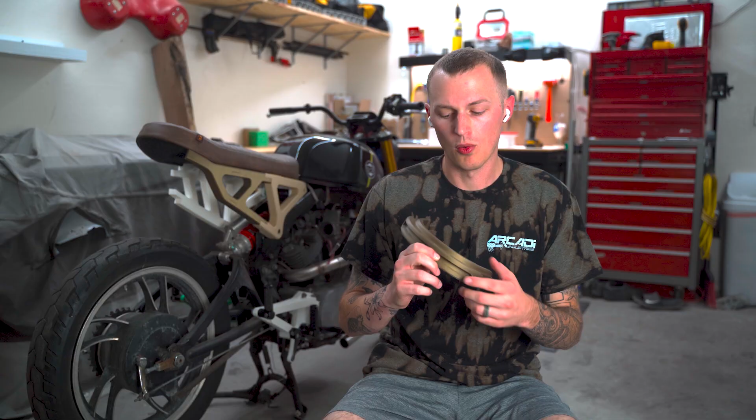Hey everyone, in this video, I'm going to show you how I created the carbon fiber, or forged carbon fiber, mold for the tail piece of my subframe. So I'll take you over to the bench and I'll show you exactly how the mold works, what the design process is, and then we will actually start forging the part.

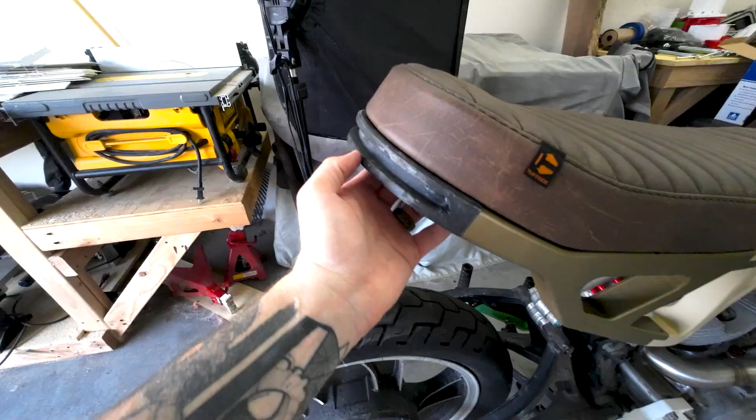All right, so we need to make a mold for this part here. And you can see I have the components here, but let me talk you through exactly how this process works. So essentially this is a bunch of carbon fiber pieces, right? They're cut up into a bunch of 1-inch sections, and this is how we're going to create the part.

So to create a forged carbon fiber piece, you essentially need to create a mold for a shape of the part, and then we're going to compress it with a bunch of force and mix it with epoxy to create the part that we're looking for. So when you have a part that you're looking to create a forged carbon fiber piece or a mold of, essentially there's a bunch of different ways you can do it.

What you want to do is you want to take the part in its most flat state, and that's kind of where you want the pressure to be. So we need to create what we call a piston to push in and create this component. So obviously if you tried to mold it like this and press it this way, it's not going to work because of the shape of the part.

We could place it like such and push in and create it in this direction. But the problem with that is when you're filling the mold, it will be difficult to fill that perfectly evenly. So essentially you want to do it like this. This is the shape that we want to create for our mold. And then we want to fill it up with the epoxy and the carbon fiber and then create our part.

So when you're creating molds, you typically need to have a draft angle. So you need to have some sort of angle on it so that you can pull it all out. Otherwise, you need to have a bunch of pieces. I chose to do a bunch of pieces of the mold just because then my parts don't have to have a ton of draft on them. And the draft always makes it a little bit more complex.

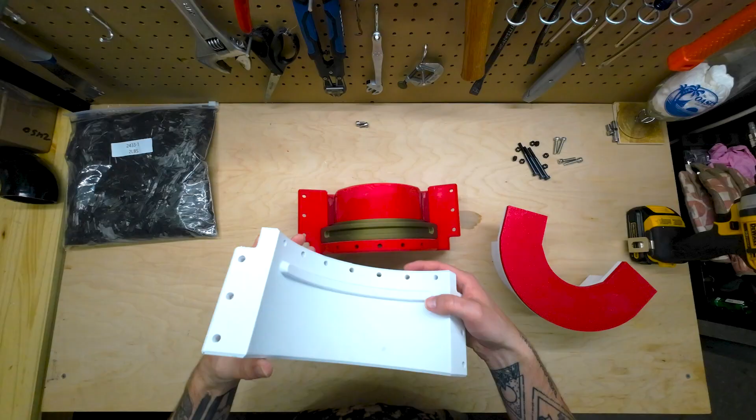So the part's in the mold, and you can see I have this other piece. This is the front piece that I've designed, and it has the cutout specifically for the brake light pocket. So this will go over, it will place in here, and this is what we will bolt into place, right? And that is what's going to create the shape, the outside shape. And it will also create that brake light pocket.

So then when we remove it from the mold, essentially what we'll do is, I've got these flanges here that are bolted in place, and we've got these bolts in here. So essentially, when those are all unbolted, I'll slide this out, we'll unbolt these side pieces, and then the part will come right out the front.

Now, what you'll notice is this section here is quite large compared to the actual part. So when you place the carbon fiber and the resin in here, because it's not compressed, it's going to be quite a bit higher than what the actual part is. If you just make your mold the same shape of what you need, you won't be able to compress it enough to get it all tight.

So essentially, we're going twice as tall on the piston side as the actual part, because when we put the carbon fiber in with the resin, it'll probably be quite a bit up here, and then we need to compress that down. So the piston, which is what we've been talking about, has the shape of the top of this. So you can see this part kind of has a lip to it, and this piece fits underneath the seat.

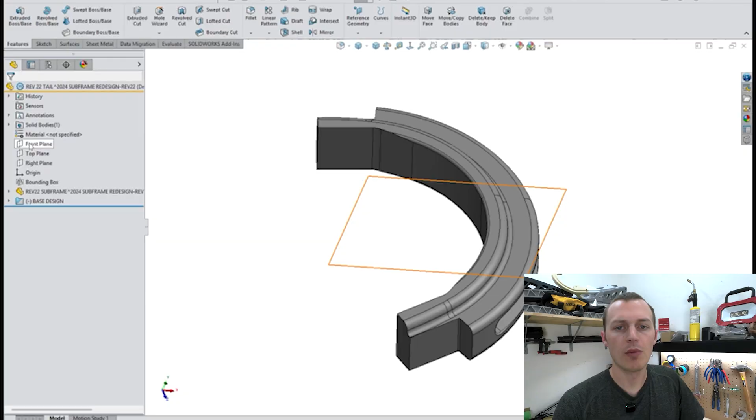So make sure that all of the components to your mold have chamfers or radiuses on them so that you can actually get a chisel in there to chisel them out after the mold's all done.

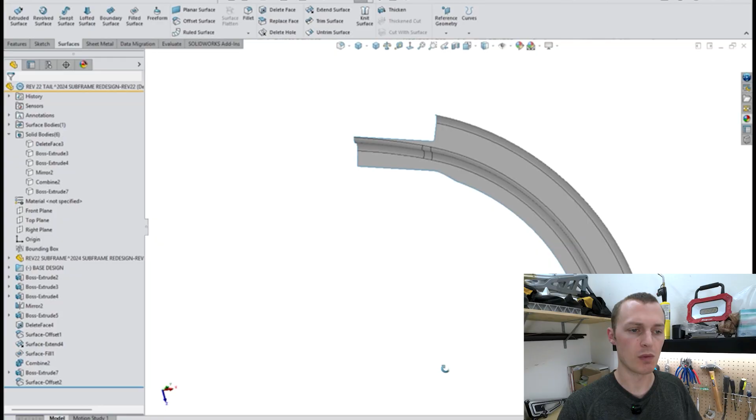Because when you pour epoxy, you essentially are creating a vacuum in there, and it makes it really difficult to split apart. So much so that some of these pieces that I have actually broke the 3D print right off. So you definitely want to take that into consideration.

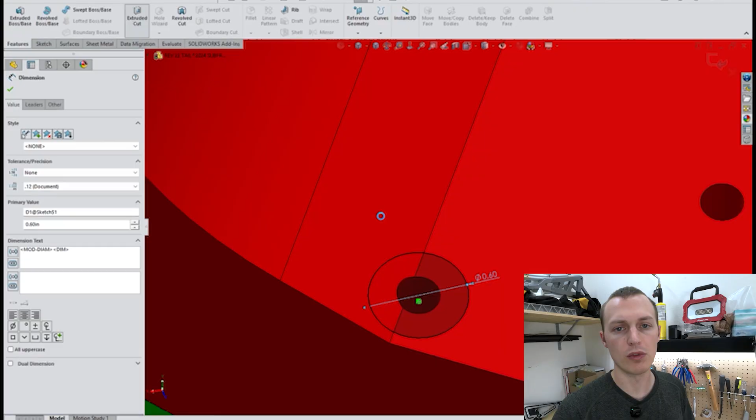I always think creating more parts of the mold is a little bit easier to take apart than trying to use draft and pull them out using the draft, but that's just my personal opinion. It all comes down to the geometry that you have and exactly what you're trying to do.

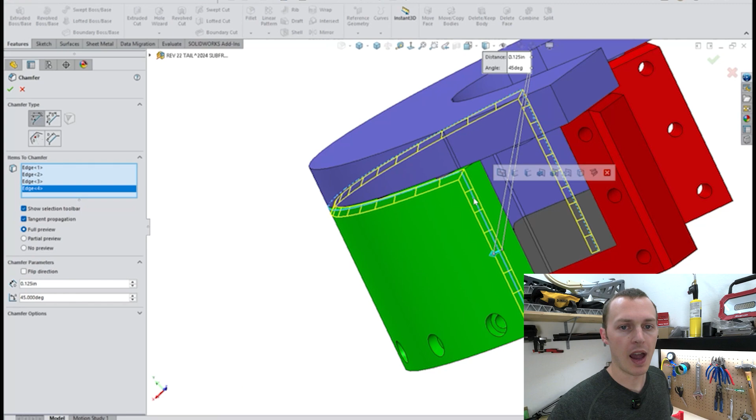So as far as 3D printing goes, they suggest on their website or in their videos to use PETG and use a 75% infill and 5 wall loops. With how large these prints were, it would actually have taken so much material. So I did 6 wall loops on the 3D print, and I did like 30 to 35% infill, and it actually worked totally fine. In the next round of forging that I do, I'll probably go even less just to use up a little bit less material.

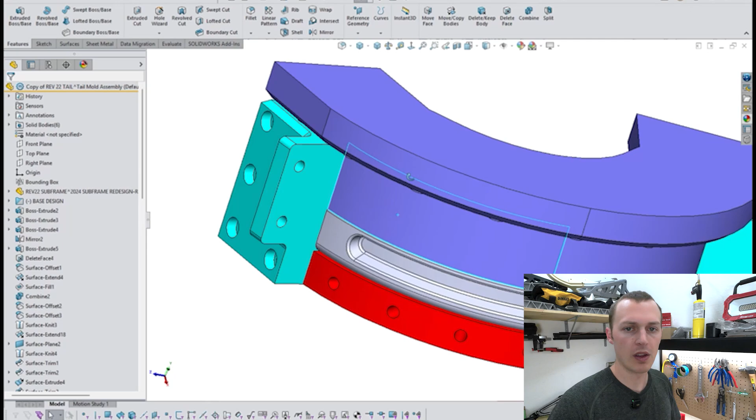But yeah, so definitely use PETG, make sure you use release wax. I printed with a pretty fine resolution, but at the same time, when it was all said and done, I did sand it. So you could probably use a larger tip on your printer and a little bit more coarse print, and then just make sure you sand it down.

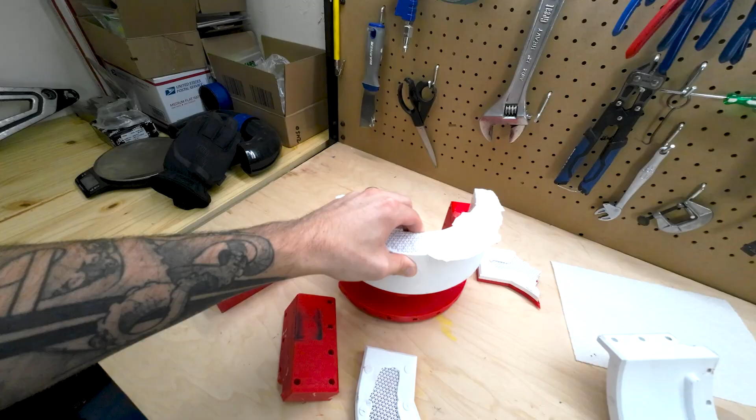For the actual design though, there was one thing that I wanted to point out. In the actual part, this was my piston piece, right? So this was the piece that comes down and pushes in and creates the part. And you can see these parts are kind of already destroyed from taking it apart. But the back side here, this is where the flange lived. So you've got this big flange here, and that's what seats down onto the top of this when you press all the way down.

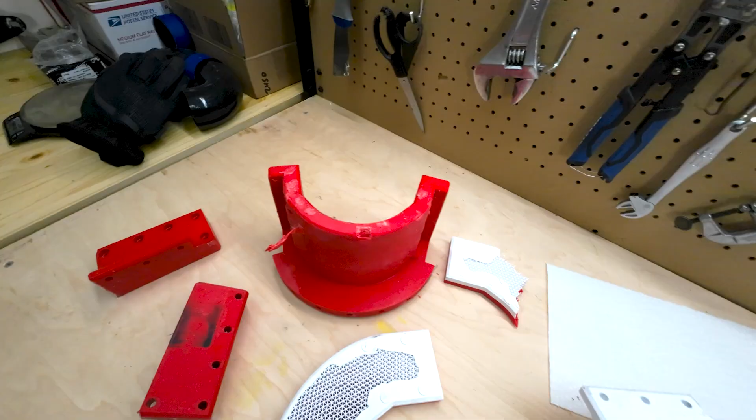But when I was trying to take this apart, because this piston was actually stuck in here, it was really difficult to get apart. So what I ended up doing was using a pry bar to try and pry this out, or pry it up. But I could not get it out. And that's what ended up breaking the 3D print.

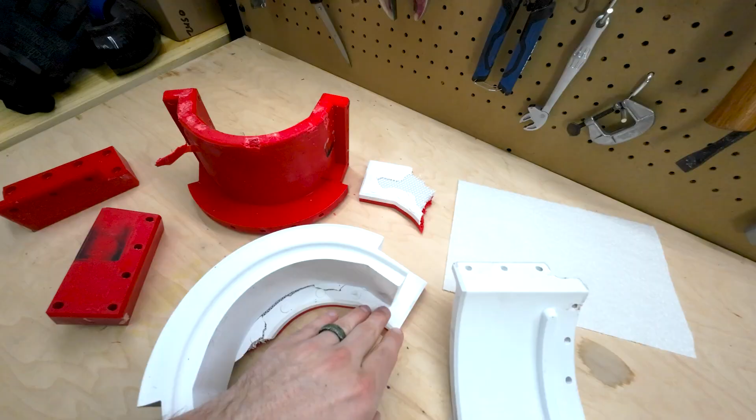So what I suggest doing, and what I'll do in the future, is that the piston itself will be its own part, and then the flange on the backside will be its own part. So when you're ready to pull it off, you can actually unbolt the flange from the piston, so that you just have the piston piece in your mold like such. And then you can get a chisel down in between the piston and the main part of your mold, and that should help break it off. I literally had to break the 3D print just to get it off, so I think it's better if you print those as separate parts.

Hey guys, I'm getting ready to start weighing out the carbon fiber that I'm going to need for this specific part, but I wanted to run you through exactly how you calculate this. So I've been using the Easy Composites website, and they specify that you start by looking at the CAD model if you have one, and you look at the volume of the actual part itself, in cubic centimeters. So in this case, my part is 226 cubic centimeters.

And then from there, you multiply that value by 1.4 to get the final weight of the part with the resin and the carbon fiber in grams. So in that case, this leaves me with 316.5 grams. And then from there, they specify that you want to split it up 60-40. So 60% of the part is going to be carbon fiber and 40% is going to be resin. So you take that 316.5, multiply that by 0.6, and you get 189.9 grams. So I need to weigh out that much carbon fiber.

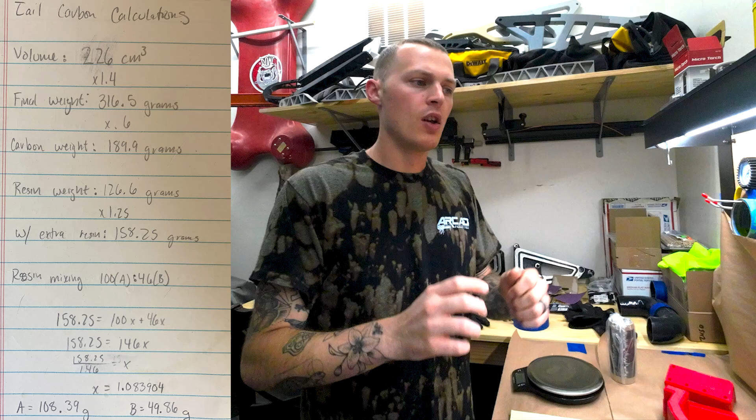But if you watch some of their other videos, they specify that if you're trying to optimize the carbon fiber for even stronger results, you take longer strands of carbon fiber and put them in. So I do have a roll of just long carbon fiber strands.

So what I'm going to go ahead and do is mark them out the length that I want and cut them, and then I will measure up some of these as well. They say you don't want to go more than 30% of your volume, but in this case, this part isn't super stressed, so I'm not going to go too much.

But what I will do is, after I'm done weighing it, I will take half of the forged carbon fiber out into two separate buckets, and what I'll do is I'll lay in the first batch of forged carbon fiber in the mold, and then I'll take those long strands, put them in so they're directly in the middle of the mold, and then fill it up the rest of the way.

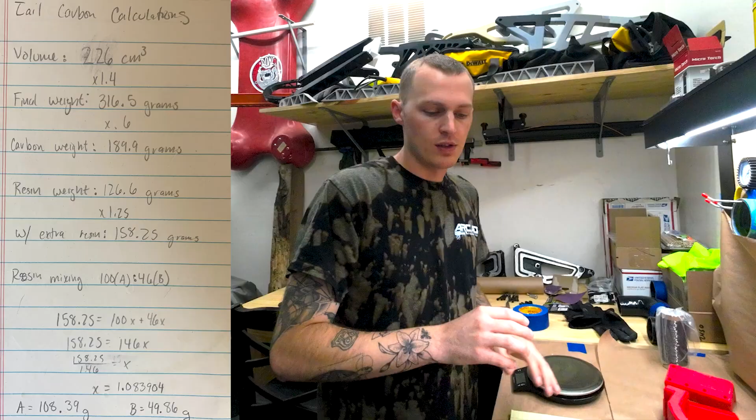So we've got 189.9 grams of carbon fiber that will be mixed between the long strands and the 1-inch cut pieces, which I have here. And then the resin weight will be 126.6 grams. They do recommend that if you're in a larger mold to mix up about 25% more resin, just because obviously you'll have some that sticks to the brush, it'll get other places. And you always want extra that will come out of the mold.

So you multiply that by 1.25 and you get your total resin weight of 158.25 grams. So that's all the math there. But then the other thing that you got to look at is the resin itself that I'm working with. You do mix it 2-to-1, but it's 2-to-1 by volume. In this case, I'm not mixing it by volume, I'm mixing it by weight. And they say you want 100 parts to 46 parts of the hardener.

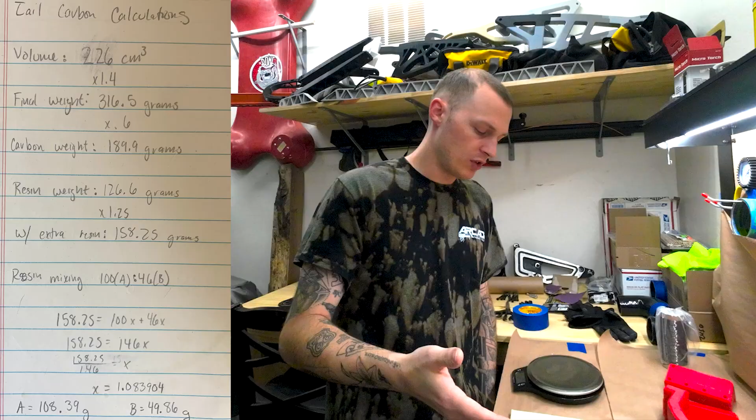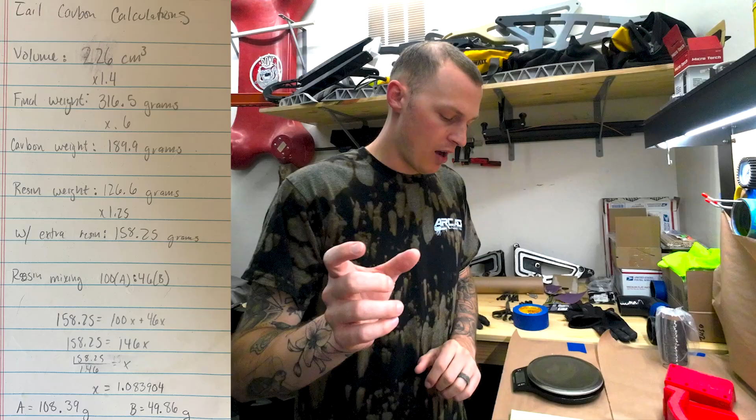So you do some simple math. You essentially say, I need 158.25 grams total. And then you say that that's equal to 100 plus the 46 for your other parts, which leaves you with 158.25 divided by that 146, which is the 100 to the 46, and that gives you 1.08 whatever, and you multiply that value by 100 to get your epoxy and by 46 to get the hardener. So that leaves me with 108.39 grams of epoxy to 49.86 grams of hardener.

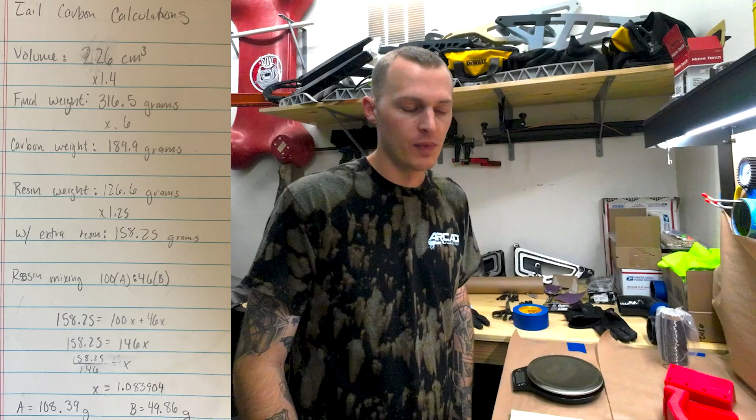So I took you through all the math. I know it's probably a little bit cumbersome or just annoying to look at all the math, but if you are doing it, it is helpful to have all these values and know how to calculate all of them. So what I'm going to do now is I'm going to cut up some pieces of the carbon fiber to length, and we'll start measuring this out.

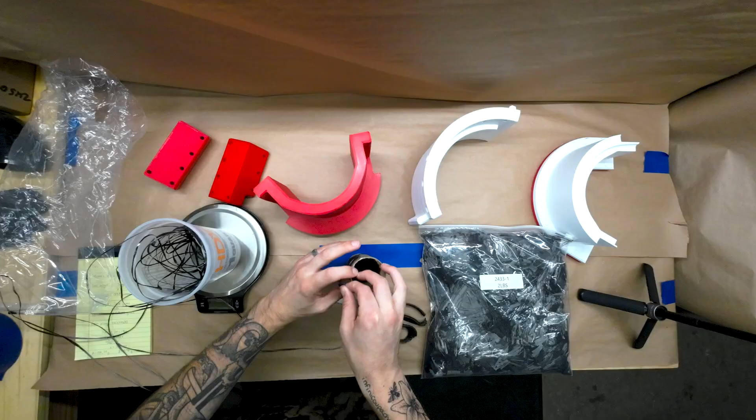In the last video, I was measuring out the amount of carbon fiber needed for the mold, and I realized that I accidentally weighed it to the resin weight, not the carbon fiber weight. So I have adjusted that. I took some carbon fiber out to match the weight that's needed.

So now I'm going to spray the mold with this mold release. It works well with epoxies, or at least it says it does. I haven't used it before. So I'm going to give this a couple light coats. It does say to potentially brush it on, but I'll see how that looks when it's applied. And then we're going to move this inside to do the actual molding.

With most epoxies, when you mix the hardener in, it creates an exothermic reaction, which just means that it generates a lot of heat. And heat also makes it actually cure faster. So in a lot of cases, if you get epoxy too hot, it will cure a lot faster than it needs to, and its working time decreases.

We live in Phoenix here, and right now it's like 85, 90 degrees already in the garage this morning. So my worry is that if I try to do it out here, the epoxy will cure too fast, or at least the working time will decrease, and I might have issues just getting it all done in the time. So I'm gonna spray these molds here, and then I'm gonna go get set up in our kitchen. Put down some of this cardboard painting paper just to make sure that I don't get epoxy everywhere, and we're gonna start molding.

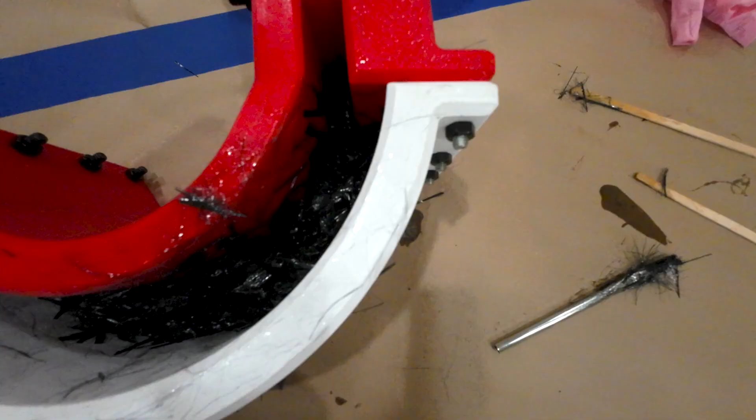All right, we've got all of the carbon fiber in there with the epoxy. I think the only thing I would do differently if I did this again was put in less carbon fiber at a time and make sure that it was fully wet. I feel like I put in probably too many clumps of carbon fiber and then couldn't get them fully wet, but we're gonna go ahead and get the piston in here and see what happens.

That went on a little bit better than expected. What I'm going to do is wrap some parchment paper around here and then get the C-clamps on, just because I don't want to get all my C-clamps covered in epoxy. So I got some parchment paper, we'll get that on, and then we'll start getting the C-clamps on.

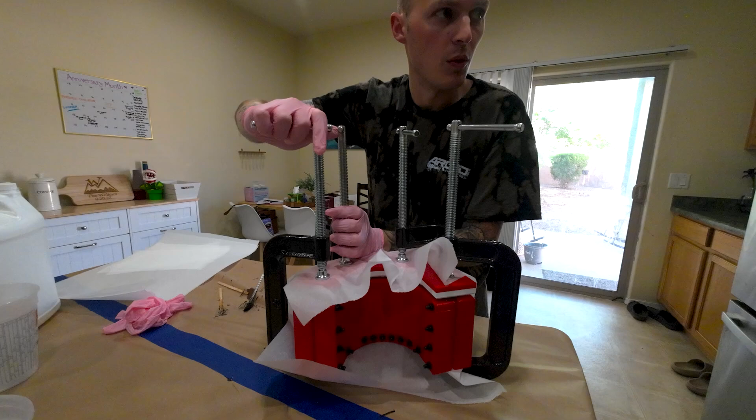All right, as you can see, we are fully seated. In the mold design, I remember talking to you about how I had these little posts. You can kind of see one right there. So as I push this all the way down, if I didn't have those little circular bosses there, then you wouldn't have any way for the epoxy to get out. So you need to make sure that even when you close it all the way down, you have a slight little gap. That way you have room for the epoxy to seep out.

So you can see I actually ended up filling up a little bit more epoxy, just because I felt like I used a lot of it. So there will be quite a bit that comes out, but it's always better to have too much than not enough. I'm gonna go ahead with a paper towel and try and clean some of this up, but we are completely seated. And then in the next couple days, we'll end up pulling this apart and seeing how everything looks.

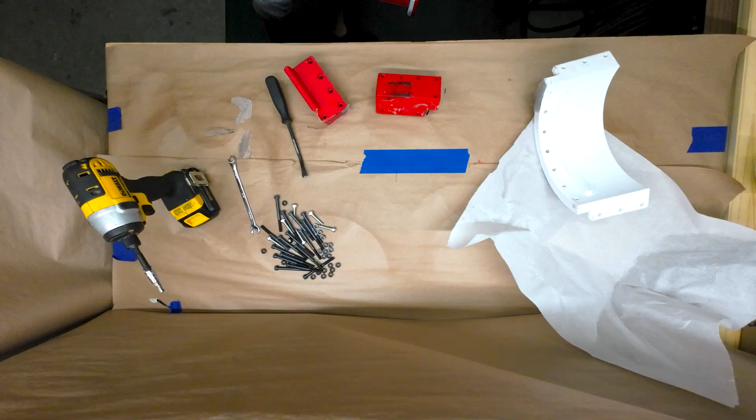All right, guys, I was able to get the mold apart. As you can see, it is broken into a bunch of different pieces, which I'll get into a little bit more about how I could have changed the design to make it a little bit easier. But essentially what I ended up having to do is use a chisel and a hammer and some screwdrivers to pull it apart. As you can see with some of the chisels, I had to break some of the mold pieces off.

So when you fill with epoxy, the epoxy fills out and gets all the air out. So essentially you have a vacuum trapped in there, and it's really hard to get the part away from the mold. So that's why you use a lot of the release wax. As you can see, a lot of the epoxy that came out between the piston and the actual mold just kind of flakes off. It comes off relatively easy, which just means that we had enough release wax on here so that the epoxy didn't stick to the mold itself.

These side pieces here actually broke off perfectly, so there was no damage to these. So if I wanted to reuse these side pieces, I could. But this mold here is most likely garbage. Obviously the bottom piece, the mold I cared about, is actually pretty good. So you could potentially use this, but probably not. The front section is actually intact. I would just need to clean off some of the resin that's on here, but for the most part, we could actually reuse this if we wanted to.

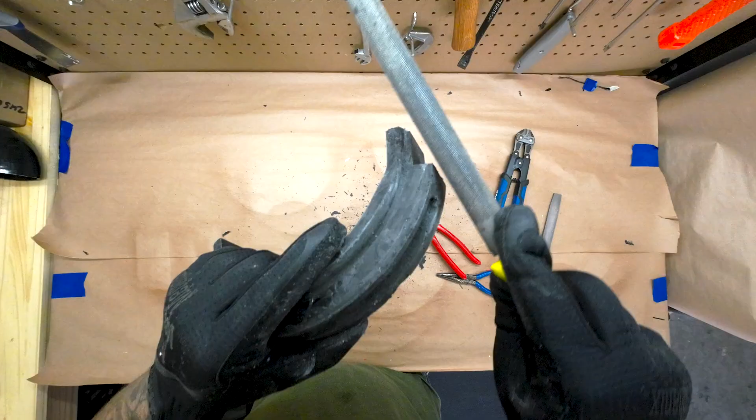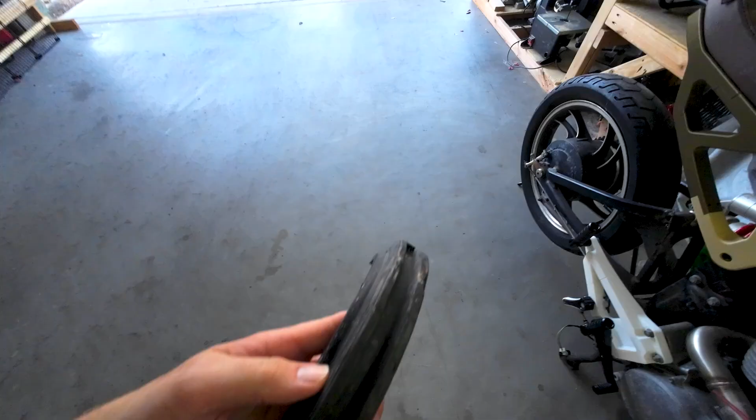All right, so the part is cleaned up. I sanded it down just a tad bit. So you can see there's still some finishing that still needs to be done. I need to go through and sand it some more. There's obviously still some voids here. I'm hoping that this part will end up being usable, but if not, I can always remake it. It's obviously the easiest one.

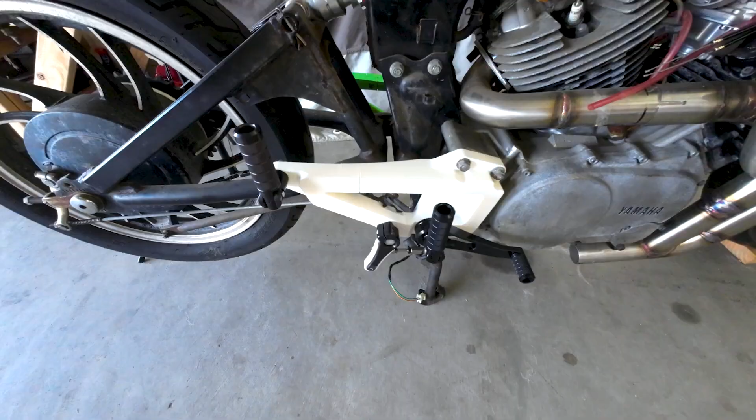I'm gonna go ahead and make the rest of the subframe. Honestly, I'm gonna make these foot peg brackets first because they're easier than this one large piece. But once this is all done, I'll obviously get this on here, and we'll get all the subframe, and then if I need to remake this piece, I will.

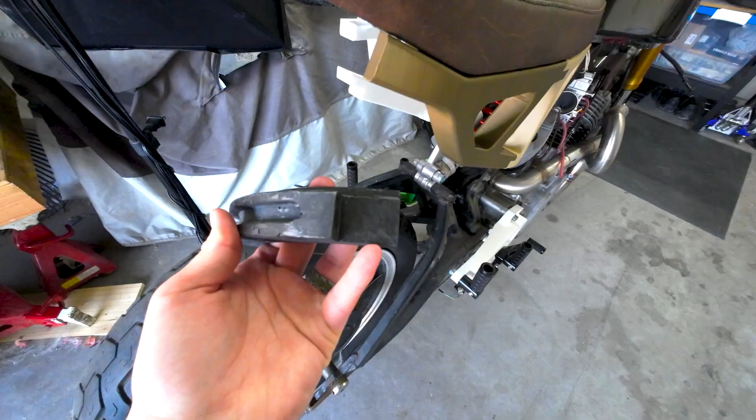But as you can see, it fits really nice. So we're definitely onto something. It matches the 3D print model that I had, or the 3D print prototype. And we'll see if this is gonna end up being a usable part. What I still need to do is I'll 3D print a template to cut the holes in here so that I can mount to the tapped holes that are gonna be on the inside here. So that's where this guy fits up.

So this has been quite the journey here, trying to go through with the forged carbon fiber. So this is obviously the first one that I've done. It's not perfect by any means. I think it's still salvageable. I think if we do a top coat of epoxy over the top of it, sand it down, and clear coat, it'll obviously look really nice, but I'll determine that later on down the road when we get the rest

of the subframe done. So the big point of this whole video and this process was checking to make sure that the forged carbon fiber was actually going to work. So if for whatever reason I went through this mold process and I didn't get a usable part, or it just didn't work out well, or the 3D print didn't work, then obviously I would have had to go a different route with the subframe. But since I know that this process works, we can continue making the rest of the components and hopefully in the next few months have a subframe.

Just the mold itself took like 5 days to print just for the small piece. So it's gonna take some time for me to get the rest of the mold designed for each side of the foot peg brackets and the rest of the subframe. So that's gonna take some time. It's gonna take a lot of time to print. And then in a future video, you'll see me do each side foot peg brackets, and then we'll do the subframe, and hopefully going forward, we'll have some better looking parts.